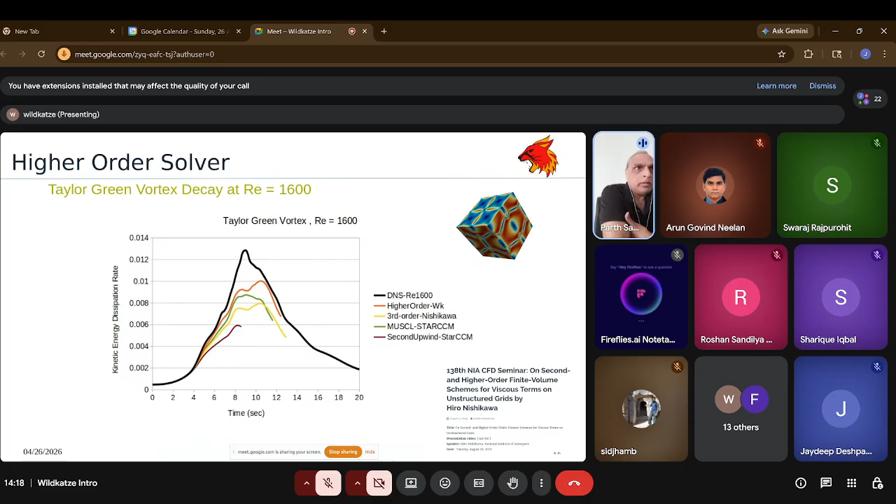The MUSCL scheme in star CCM with the settings the developer suggested, which is basically trying to take out the limiters, does better, but you can see the higher order method in Wildkatze is far better.

Now, the second innovation that came out of Wildkatze is that we have a better scheme for the VOF. When you are doing volume of fluid calculations and multiphase calculation, the interface capturing scheme matters a lot. So we developed a completely new scheme for interface capturing, nothing like anything you see in other software. The original formulation doesn't even have Courant number inside, so in theory it is Courant number free, and it's very sharp. If you are using isoAdvector etc. in OpenFOAM, or the geometric scheme in Fluent, this scheme is pretty much as sharp as well.

So the core concept I can tell you, if you are curious, because it's completely different. The idea is that when the interface moves by delta t time, imagine the interface is there and you take a step in the solver, it moves by delta t. The idea is that the interface remains sharp even after that dt is taken. So this way of thinking is a little different than how it's typically done.

Typically, you try to estimate the interface and then solve the linear system to affect the interface. But here we assume the interface is going to be sharp. So this is built into the assumption.

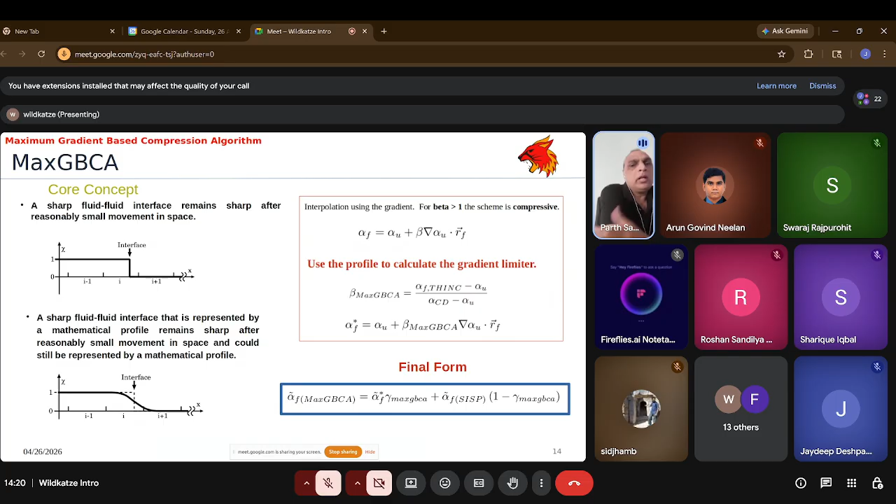And then we blend it with a lower order scheme based on the interface pattern. So how does this scheme do? We take a very difficult test problem for it.

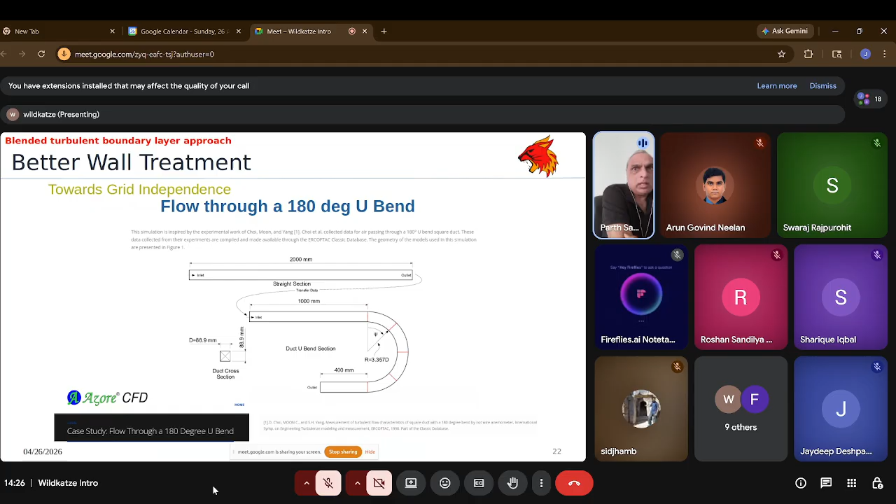But we do the same case with Wildkatze, and you can see that at this point where the profile changes, only the higher order solver is able to predict it. The second order is still doing better than Fluent and Azore, but the higher order is the only one able to predict this inflection point correctly. So you can see the higher order solver is pretty effective.

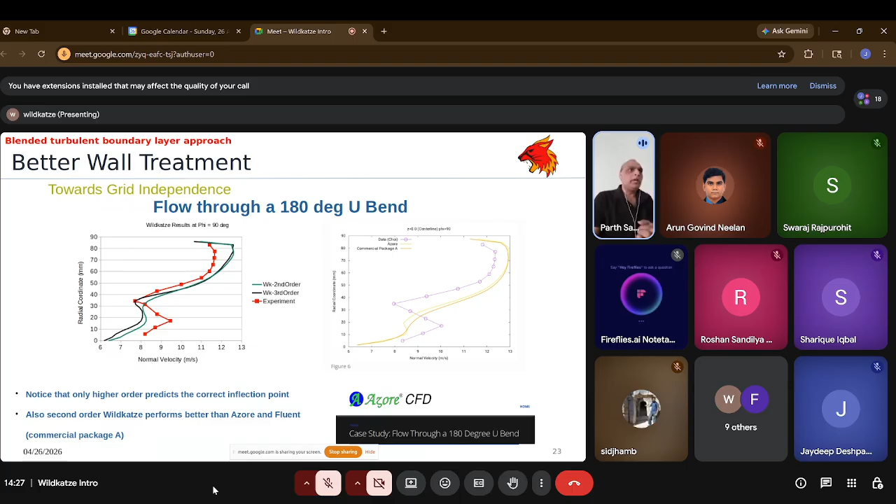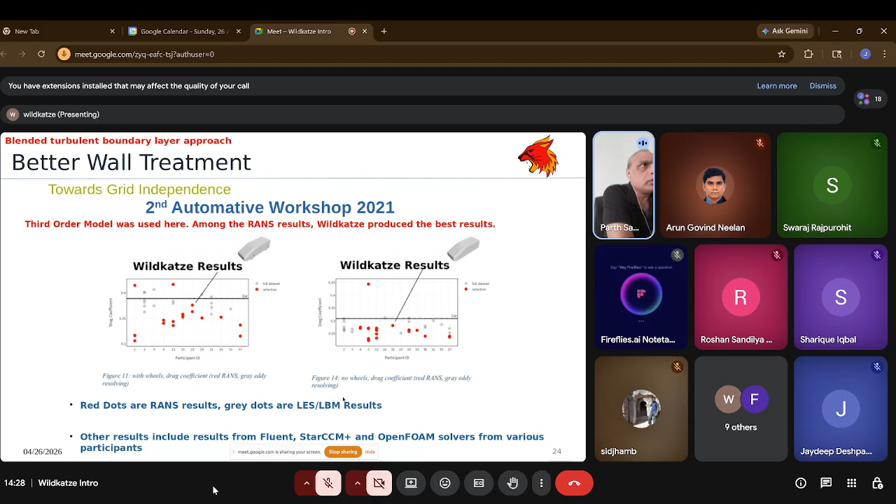We also compared with OpenFOAM for the Auto CFD case, and you can see we still do better than OpenFOAM for this case. The OpenFOAM case is not run by me - it's just taken from what was submitted to the workshop - but we still have more reliable results. So you can see wall function, higher order, and everything makes sense.

One of the things you can see so far is that whenever you test it, we come out to be quite accurate. There's a myth that if the software is more stable, it's somehow more inaccurate. This myth has to be given up, because you can see we are far more stable than any software, but usually we are also more accurate.

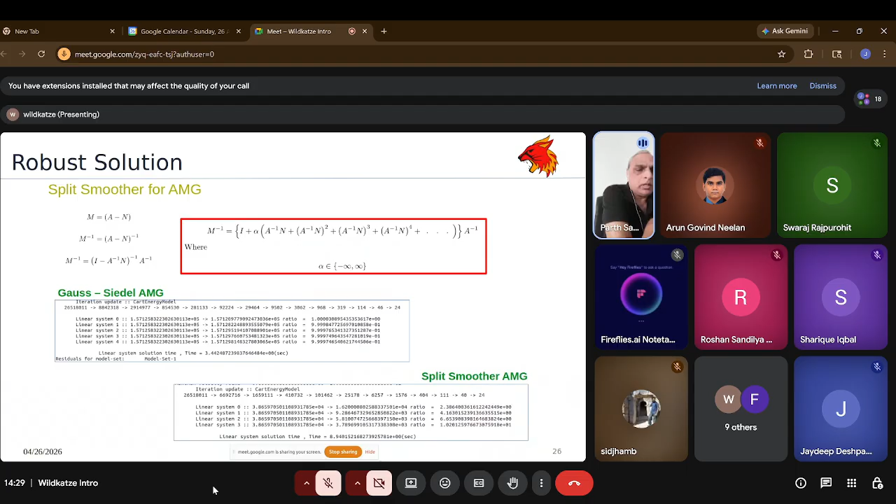One of the more innovative things that came out of the research so far is this split smoother. Split smoother is based on a polynomial, where we find this alpha. If alpha is 1, it becomes a pure Neumann polynomial. But when we find the appropriate alpha value, you can have a very robust AMG solver - that's what you see here. With the help of this, we're able to get good results for very difficult problems. This adds to the robustness of the software.

So what is coming next? We are creating the software for the Cartesian mesh. We are the only one which is a multi-physics framework for Cartesian solver. And we are also developing a multi-GPU solver. So what is Cartesian framework?

The Cartesian framework is basically, you have a Cartesian mesh, and given the mesh, the solver will create or mark the regions inside, and then you can solve the general physics on it. The way it differs from the Cartesian solvers in academics is that there you can only solve certain types of physics, not a general multi-physics. So if you want to solve plasma, then you have to write the software again. But in this case, in the same framework, you can add multiple things, multi-phase, etc.

Is there any question? Okay, so yeah, please ask. Yeah, actually, I had a question. I had many questions actually. I thought I would ask towards the end. Is that okay? Okay, you can ask now. We have a lot of time.

Okay. Actually, I was quite interested, you also mentioned this GPU solver. A lot of the literature we are seeing is mainly either just single phase or two phase. So you mentioned that you have a GPU solver which is a multi-physics solver. So what is different and how does it compare? Because right now, on social media or in the papers, we don't really understand what the difficulties are and what a multi-physics GPU software can really do.

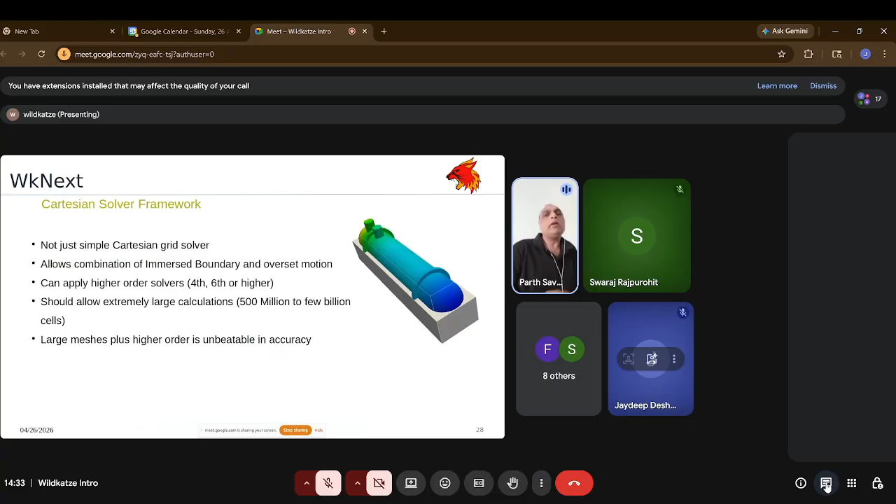The solver should not be bound to just a single type of simulation. If you do that, then you can get a very efficient solution out, but then you can only do one thing. You cannot do more. But the clients who use this software want to do a lot of difficult problems. So for us, we give up a little bit on GPU speed, and then we can provide that.

For example, here you see this is a two-phase pipe flow. In this case, we have experimental results available, and for 15 seconds the water is flown with a varying flow rate, and in the experiment we can see which channel has how much water, what the height of the water is, and we are trying to compare that with the GPU solver. So yeah, it supports everything, polyhedral, and so on.

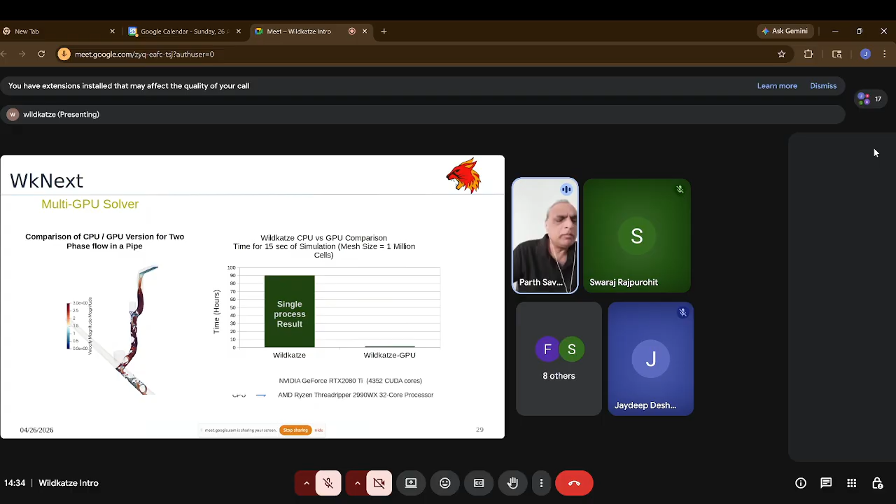I think there is also a question in the chat from Sharique Iqbal: does the solver work with polyhedral and polyhex core from Fluent? Yeah, it works on any mesh. The solver works on polyhedral, tetrahedral, pretty much any type of mesh. The Cartesian solver will obviously have a Cartesian mesh in the background, but the surface mesh can be anything.

Actually, I had one more question. Wildkatze will work on any mesh. Yeah, I had one more question. At the very beginning, when you were talking about the third order solver, this is something I have kept hearing on various CFD forums, that a lot of the third order MUSCL schemes which commercial solvers call third order are actually not third order. Could you talk about that, and how your scheme is different?

I'll explain what is going on. Let's say you have a polyhedral finite volume. In second order you take a face and the face center. This is your one integration point for second order. You interpolate the variables on that face center, and then you integrate on the finite volume. How you interpolate the values to the face, by second order or first order, also matters. But you have only one integration point.

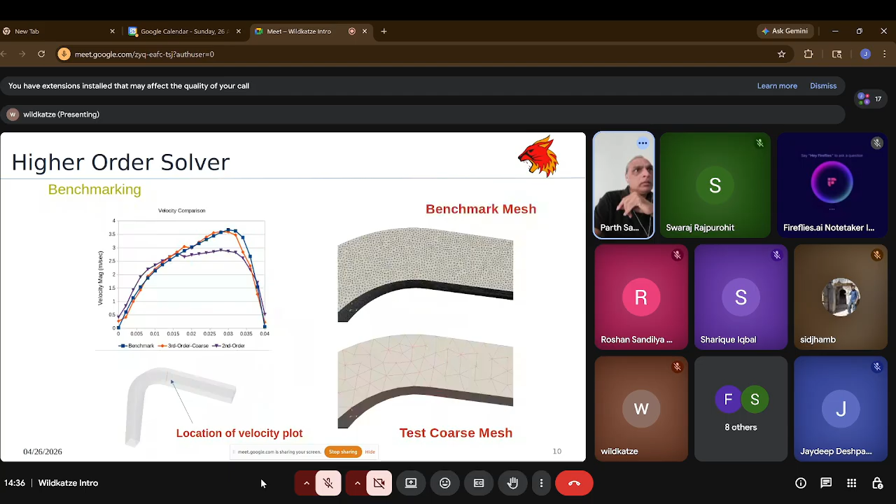If you go back here, in a typical case you have one integration point. This was the difference with Nishikawa-san's third order. He interpolated the variable by third order, but had only one integration point per control volume face. In a true higher order method, you will have more integration points. Typically, for a triangular face you will have 3 integration points, and for a quad face 4. It's costly, you have to do the interpolation 3 or 4 times, but the difference is very high.

You see, the red line is doing the truly higher order integration, and the third order Nishikawa is doing only one integration point, as he suggested. It's better than second order, so maybe he is very happy about the result. But if you compare it with the true third order, you still lose out. So that's one thing.

Another thing is that in STAR-CCM+, the MUSCL scheme is only for the convection term of momentum. But in the higher order in Wildkatze, every term is higher order: the pressure gradient, momentum gradient, convection term, and the right side. When we interpolate the volumetric flux for the control volume, that flux is higher order. So everything is higher order, exactly how a true third order should be: you take more integration points, interpolate on them, and apply the integration.

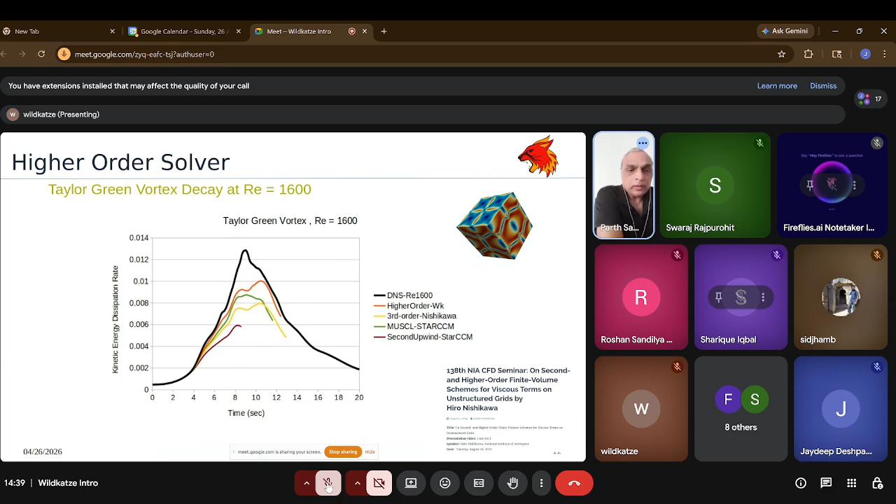I also wanted to ask whether this higher order goes well with multiphase, or does it create oscillations? Is there something available for damping out those oscillations? Our higher order is not creating oscillations, but for multiphase calculations we usually don't suggest it, because in multiphase the phase is very important and this accuracy does not really play that much of a role. But in Wildkatze you can use higher order there also, because it only adds 30-40%. Typically people don't use it.

I think you can use one case where, let's say, one of the phases is compressible, or both of them are compressible, but there is a sharp interface, and you are doing acoustics and the waves are passing through it. Then it makes sense to use higher order. If you are doing acoustics of the water, because there was a client who did this: there is a pipe and the water is leaking out, and he is calculating the sound, how the sound wave is going in the pipe,

so in the water we are calculating. So maybe there it makes sense to use it for acoustics. Yes. So if you are doing multi-phase acoustics, then it makes sense. More? Because my presentation is pretty much done now.

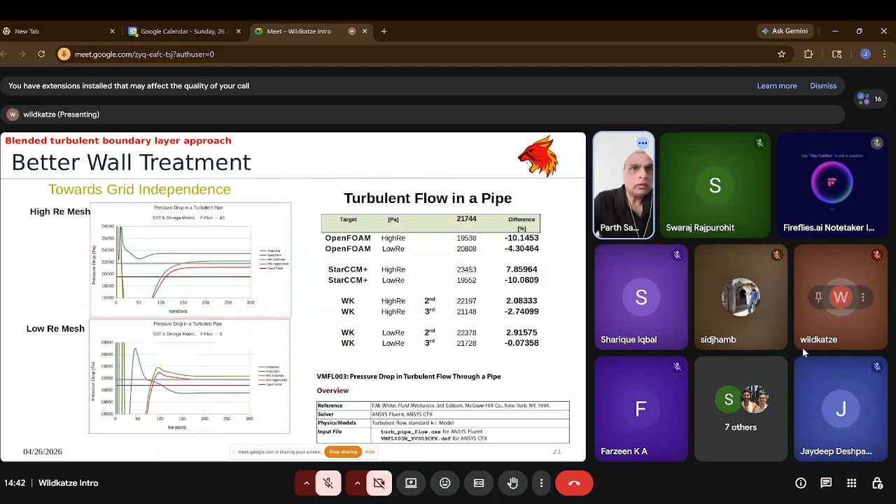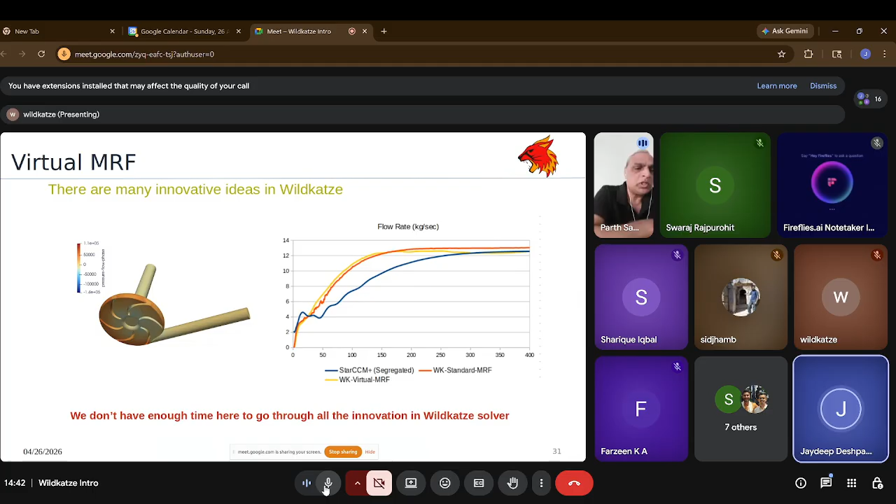Yeah, actually, the comparison which you showed with AutoCFD, I couldn't really understand. OpenFOAM you have shown as a straight line. Yeah, so I only have the one result given from the OpenFOAM workshop. They report the CD they got from OpenFOAM, only one value. So I don't have an iteration graph for it. That's why I plotted one straight line, just like an experiment.

So for this case, the people who participated in the workshop presented their results. So it's not run by me. They presented this CD value. And everything else is the same. They used the K-omega model, we also use it. So everything is the same, just two different solvers.

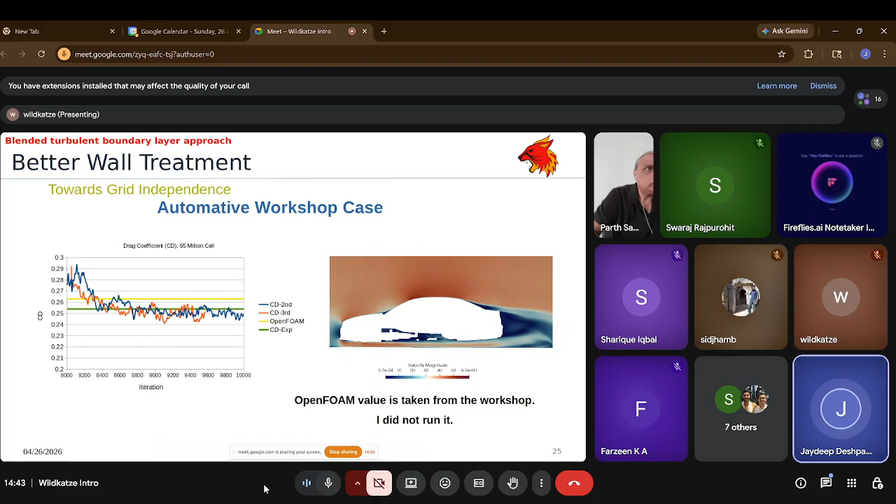Okay. The main question I had, from the very beginning when you mentioned why Wildkatze and how it is different from the commercial codes, in a very practical sense, could you talk about some test problems in which Fluent is simply not able to solve it? OpenFOAM, at least, we can understand is not stable, but Fluent of course. I can tell you. Commercial codes are usually able to solve it, but there are cases where people are not able to solve.

One case was a university student from Sweden whose group was working on ice getting melted on a rail track. When the ice gets melted, there is air coming, and the air will blow the ice. Now, all the solvers do this solidification and melting by increasing the viscosity. If you increase the viscosity, the forces on them are not correct, which means they cannot move this ice due to the air.

So the air is blowing the ice, and their group was struggling with it for like 2.5 years or something. They tried every software. They tried Fluent, Star-CCM, COMSOL, everything, OpenFOAM. They were not able to do that. So then he asked me, can you do that?

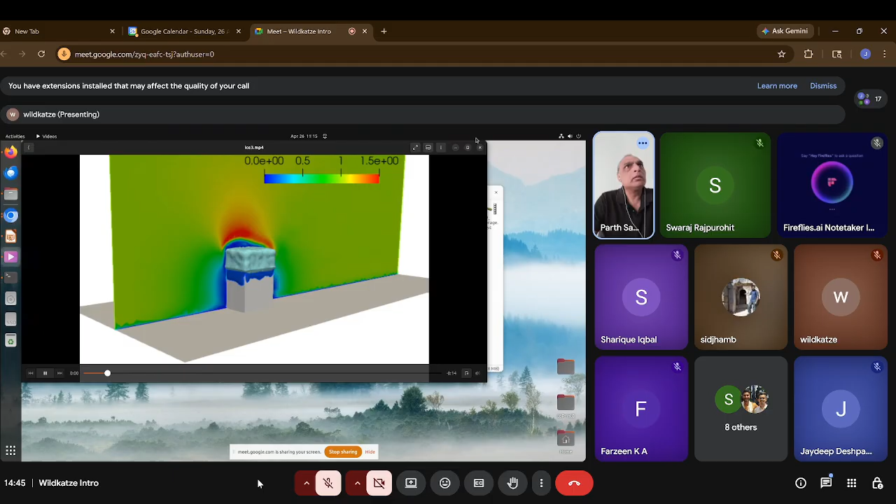And then for the first time, they were able to see that. And maybe there might be an animation for this type of test problem, if I can find it. Is there animation here? Yeah. So this is a typical example of that. You see, there is ice that is getting melted. This is the first test problem that we showed. And then it's melting to the water, and the air is also blowing.

Now, because the vacuum type of situation happens, CFX is the only software that was stable for the client, and that too sometimes diverges. Fluent and Star CCM and OpenFOAM have no chance with this problem. They cannot run it even a few iterations. So that was another problem.

Then there was a problem coming from Star CCM where they want to do a circuit breaker in vacuum, and the pressure is very low, like 10 to the power minus 5 Pascal or so. And after 6 months of trying with Star CCM, it was not stable at all because the pressure is too low. So we had no problem running it with Wildkatze.

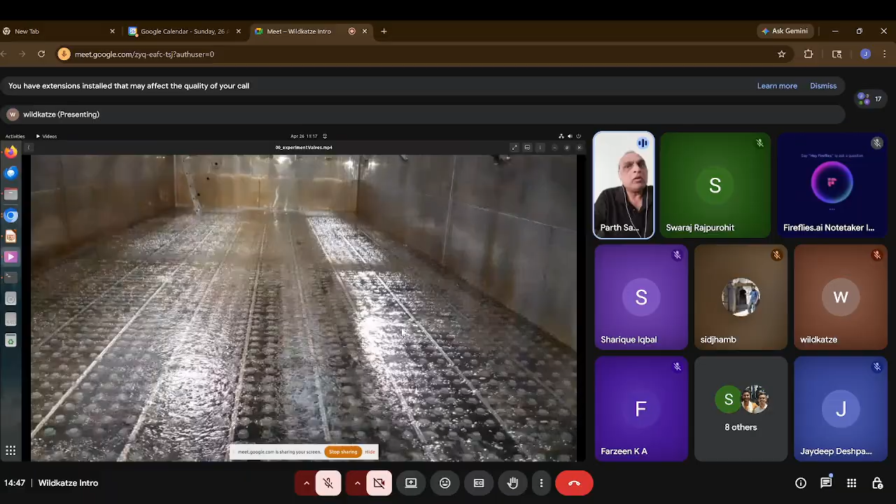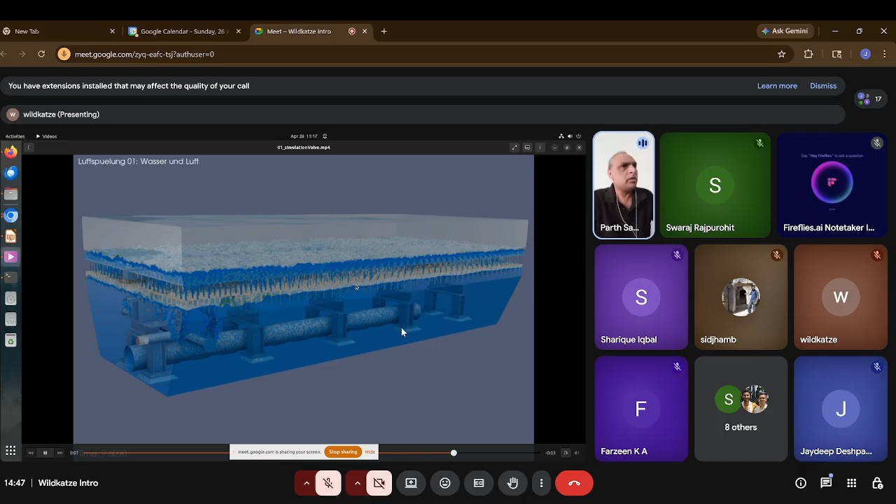Another calculation is, I warn you about the sound because I'm going to play something that will have a lot of sound. And here you see, there are 1,000 nozzles in it. And the water will go and it will create like that. And the same thing is simulated here, you see, with the 1,000 nozzles. This is not difficult, I think you can do it, but here it's far more efficient to do it with this concept, because it can take a larger delta.

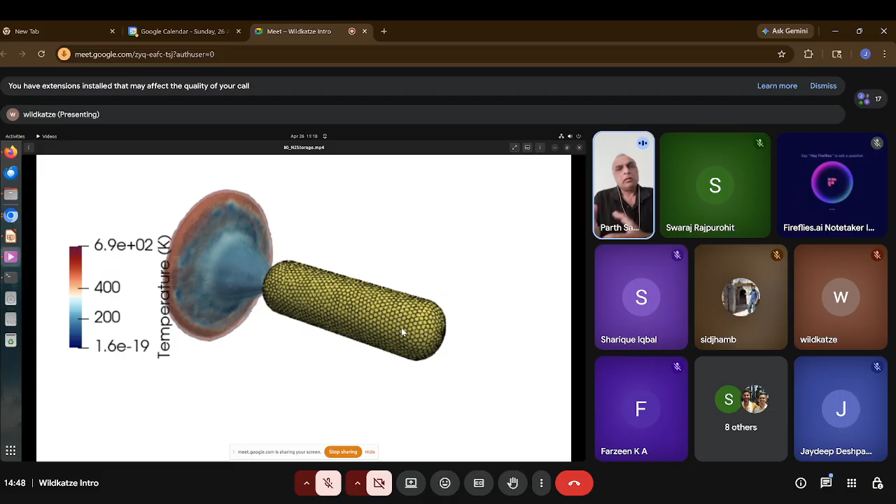Yeah, so I go a little further and quickly wrap up this part. So the design and concept of Wildkatze, which make it much more advanced than other things, is that you have a mesh. Yeah, what was the question, Sharique?

Yeah, hi. So thanks for the details. I have a couple of questions. One thing is, we are now seeing that around the world there is a lot of focus on electrochemical applications at the industrial level, be it batteries, be it fuel cells. So, do we have those sorts of solver capabilities within Wildkatze?

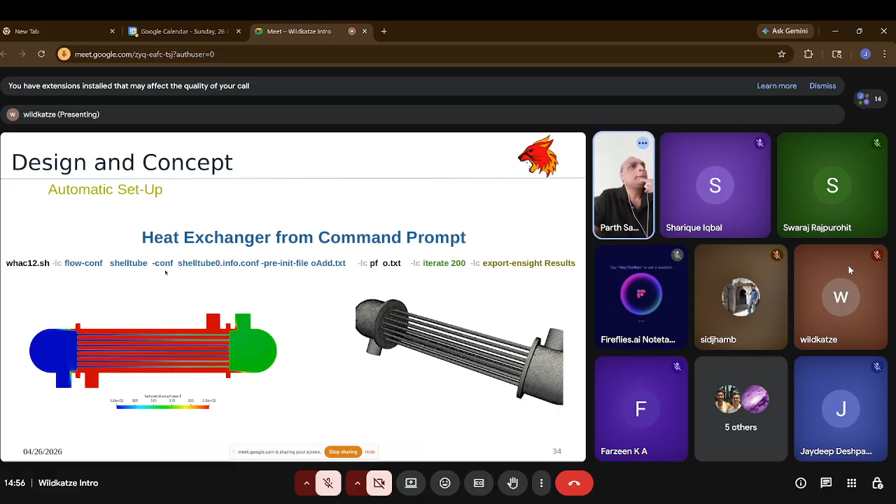And this is doing it from scratch. And it's a complicated case. We will have this as an example later on. But here you have like 4 or 5 regions and multiple interfaces. And everything is done just in one command. Once you create a configuration file, even if you change the mesh, you can again and again set up every time. So, yeah, this basically concludes.